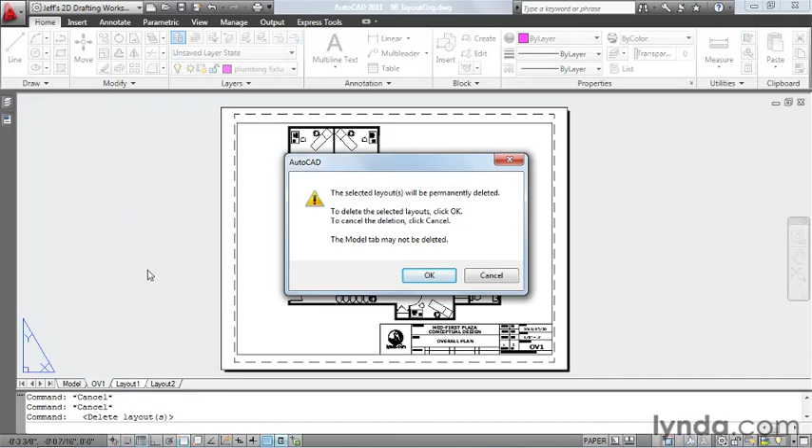And you'll get a warning saying, hey, you're trying to delete a layout. Do you want to do this? Yes, I do. I'll click OK. I'm going to do the same thing to delete Layout 2. No sense keeping layouts that we're not using.

Now, maybe I'd like to create a new layout similar to this one. And maybe I'd like to use this layout to focus on one of the exam rooms. I'll start by creating a copy of this layout. To do that, I'll click and drag on this tab name, and then I'll hold my Control key and I'll release my mouse button. If I select this tab, you can see it's an exact duplicate of the original layout.

From here, I will change the scale of this viewport to focus on this exam room. I'll start by opening the layer control, and I'll turn the viewport layer on. Then I'll double-click in the viewport. I'll come down and unlock it, and I'll pan this over to center the exam room inside the viewport.

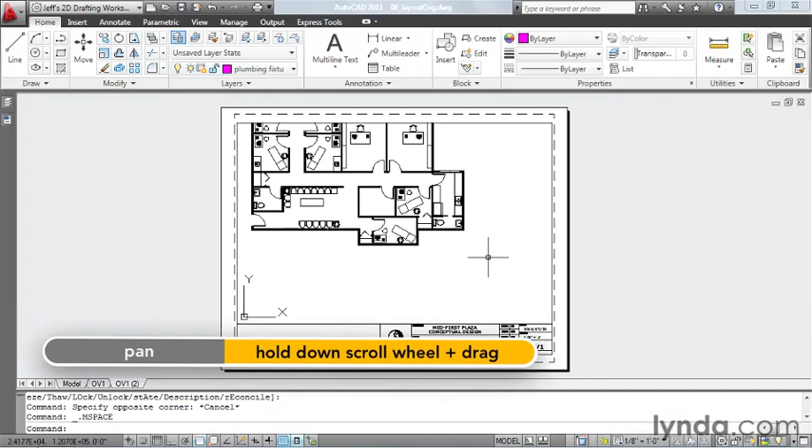Now I'll change the scale. Let's try 3/8 inch equals a foot. That's not bad. I think I can go larger. I'm going to try 1/2 inch equals a foot. That looks like it'll work well. I'm going to recenter this, and then I'll immediately come back down and lock the viewport. Now that I'm finished, I'm going to jump out of the viewport by double-clicking outside the boundary.

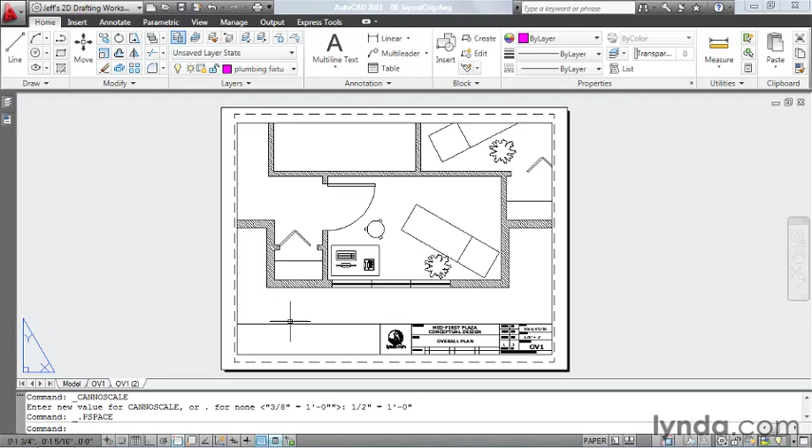As I look at this, take a look at some of this extraneous geometry that we're seeing outside the room. Remember that a viewport is a window into model space. Watch this. If I select the viewport boundary, I can adjust its size using these grips. I'll click this grip, and I'll pull it up to here. Now, I'm being mindful of my running object snaps. In fact, I'm going to turn those off momentarily.

I'll pull the viewport corner up to here, and then I'll grab this corner, and I'll pull it down to here. When I'm finished, I'll press Escape. By adjusting my viewport boundary, I was able to focus on exactly the geometry that I wanted to see. Let's turn the viewport layer back off.

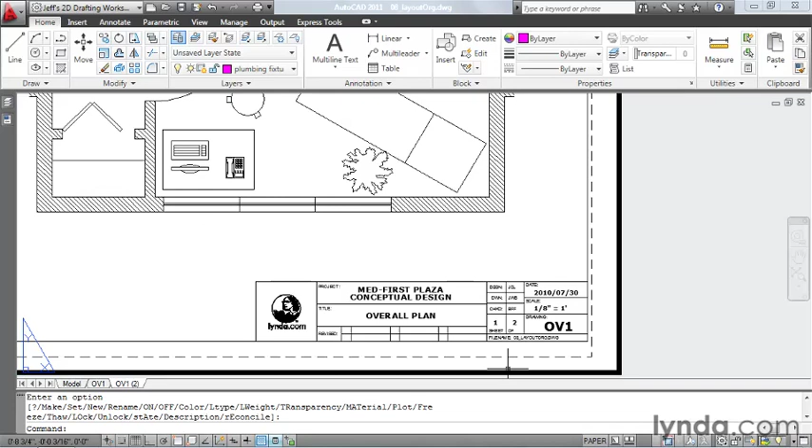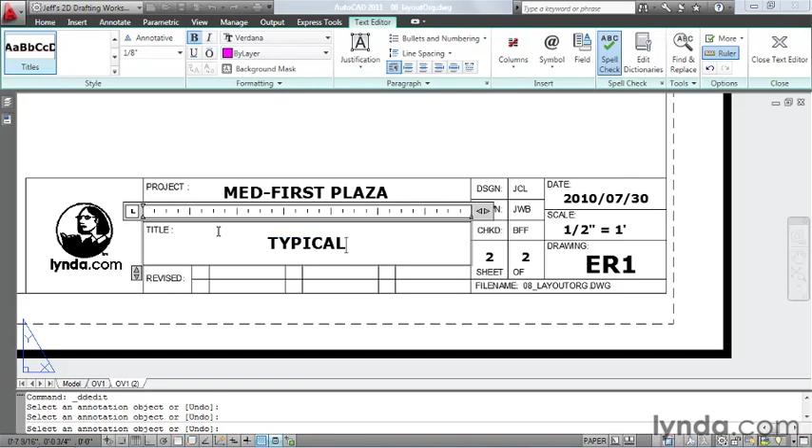And now I need to take care of some housekeeping. Let's revise some of this title block text. First of all, I'll change the scale. This is 1/2 inch equals a foot. We'll call this drawing ER1. This is going to be sheet 2 of 2. And I'll call this Typical Exam Room. Finally, I'll do a zoom extents, and let's rename this Layout tab. I'm going to double-click, and I'll change this to ER1.

Using these layouts, I'm able to take my model space geometry and create two separate plots. AutoCAD drawings can support an unlimited number of layouts. With a little organization, we can take the same model space geometry and plot it any number of ways.